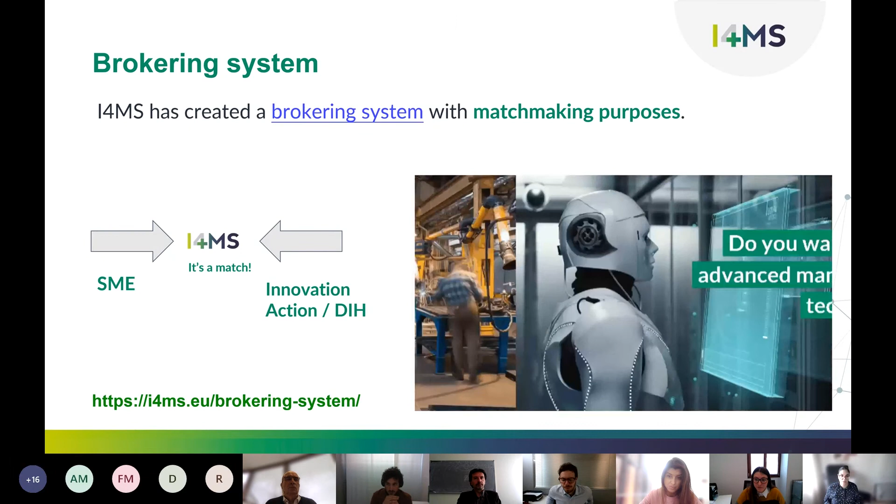We have created a brokering system, so if you actually are an SME, are a bit lost and you don't know exactly where you have to go or which open call would be the best for you, we can help you with this process. So you just have to sign up, and I4MS will help you find the best funding opportunity for you under its program.

Very briefly, we have also a community in which we debate about different Industry 4.0 approaches. I wanted to just let you know about it. We have 1,700 members. Half of this community is SMEs, but there are also some public administrations, DIHs such as Speedhub. So if you want to get to know it, it's there for you.

Just to show you a little bit, there are some success stories that are worth taking a look, and we have in the website a lot of experiments. For example, one of the experiments is related to 3D printed clothing, but not only. Everything that gets manufactured and that adopts a technology presented by I4MS, there are several experiments that you can take as an example in order to see also if you are fit for this type of calls or not.

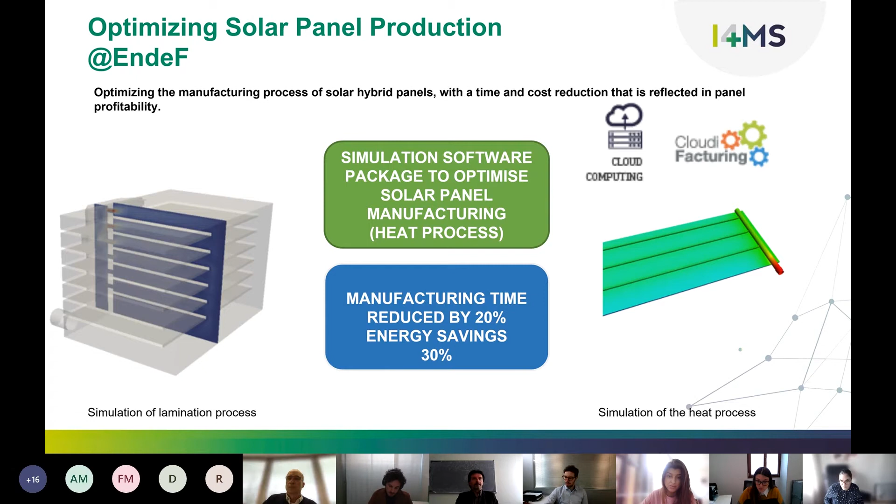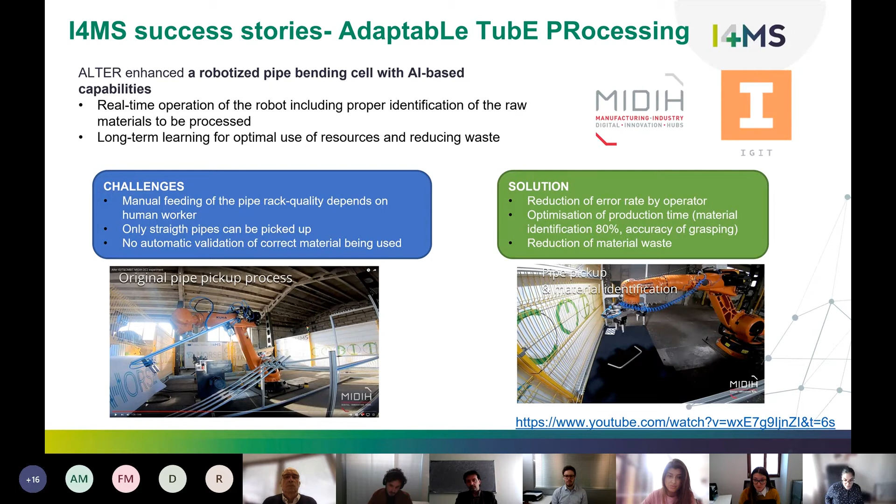Yes, and there's another one of the MIDIH project. The idea is that now I will give voice to the actual protagonists, so we will start with Better Factory. Anca, the floor is yours to explain the soon to open call and also what we are going to be doing.

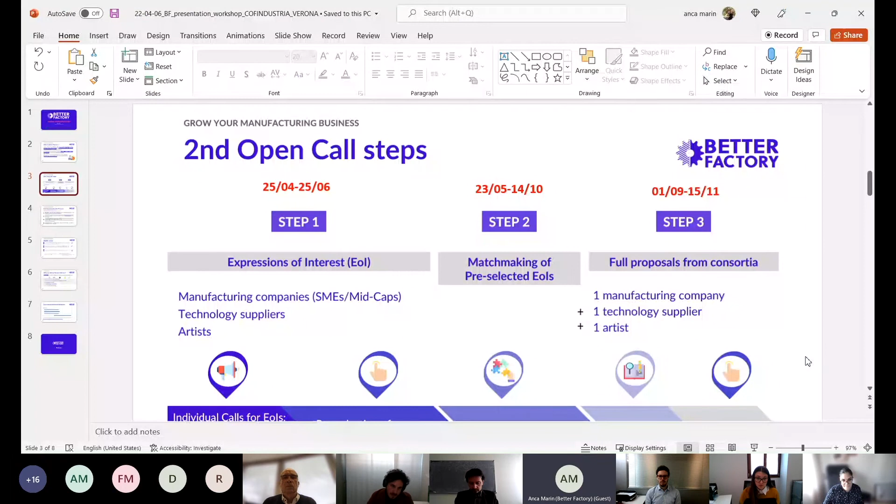Okay, thank you, Marta. Hi, everyone, nice to see you here. I'm very happy to present you today Better Factory, which is an initiative under the European Commission Horizon 2020 program.

Basically, we are inviting manufacturing companies, artists, and technology suppliers to work together in order to redesign the manufacturer's product portfolio. This can be a very interesting challenge, which can end up in a collaborative experiment made up by teams of one manufacturing company, one artist, and one tech provider, and they can receive up to 200,000 euros funding.

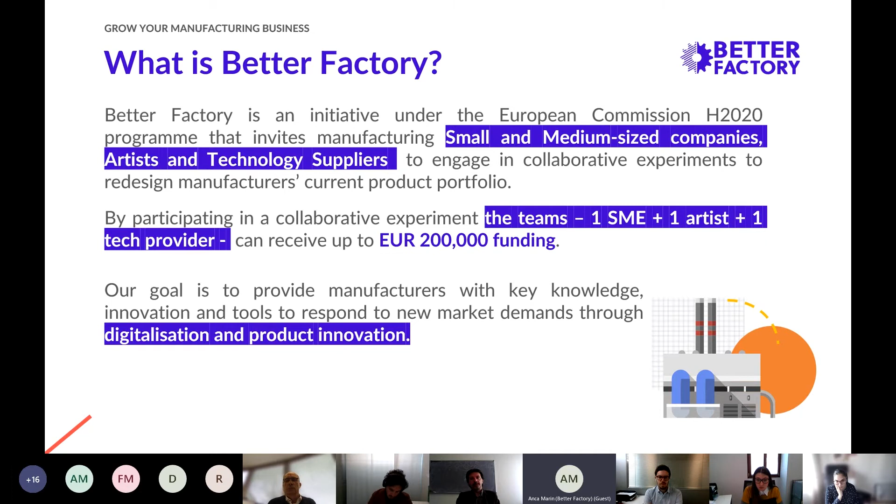We are now in the previous step regarding the second open call, and this step consists of individual applications, which are available from the 25th of April. The call is open from the 25th of April to the 25th of June.

This is where we are inviting individual applicants, manufacturing SMEs or mid-caps, technology suppliers, and artists to apply separately in order to have a chance to be pre-selected and join the matchmaking process, which is being supported by the Better Factory Consortium.

In this matchmaking, which we enable for the pre-selected applicants, we are trying to find the best fit between a manufacturing company, a tech supplier, and an artist, in order to assist them to design, create, and present the full proposal in the open call for a full proposal from consortia.

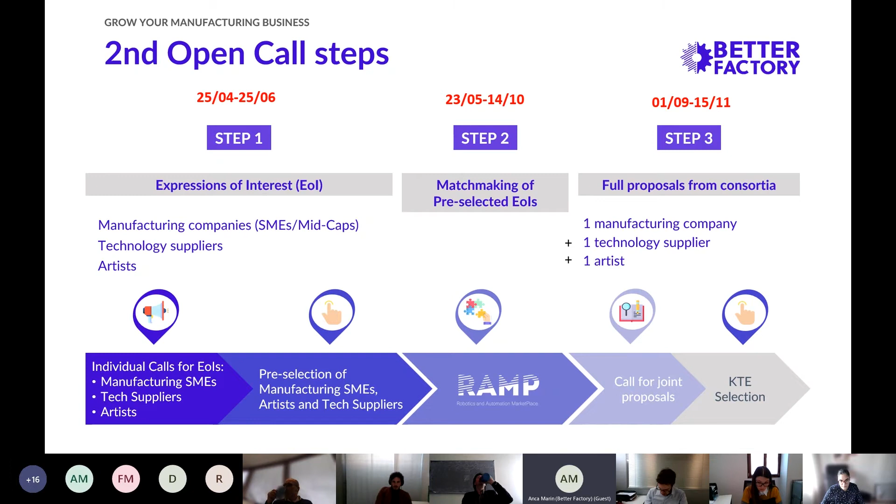This is going to be open in September this year. So at the stage of individual applications, we are inviting manufacturing companies, which can be small and medium enterprises or mid-caps, artists, and tech suppliers, to register and submit their application online.

They will find the application form available separately for each type of applicant. This is quite a simple process where we ask you to fill in information regarding your basic data, legal information, a brief description of the challenges in the case of manufacturers, the artistic expertise in the case of artists, and of course the technology you own in the case of technology suppliers.

After you have submitted these individual applications, you will go through a pre-selection process, which is done internally by the Better Factory Consortium partners. Once we have the results, we are going to communicate the outcome by email to all applicants at this stage.

The pre-selected applicants, as mentioned before, will also be announced, and they are going to enter the matchmaking process in order to form a team of one SME or mid-cap, one artist, and one tech provider, to submit the full proposal for the second open call in September.

As I've said before, manufacturing SMEs and mid-caps are one of the individual applicants we are inviting at this stage. If you are one of those and you are looking to redesign your current products and services with the help of an artist or a technology supplier, you are more than welcome to apply to this open call.

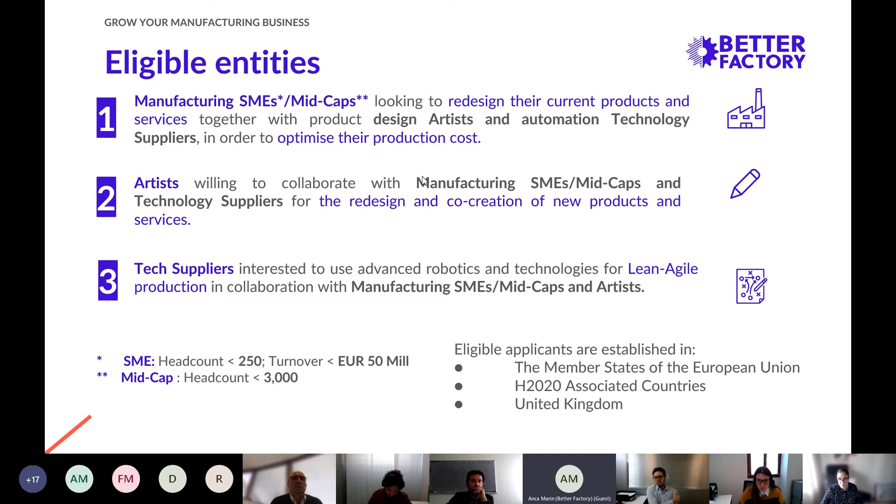So our offer, our value proposition for you right now, is to enter this individual application process in order to get a chance to form a successful consortium that will explore new markets using digital technologies, and test and develop new lean agile production technologies.

The winning consortia will also get access to training to reskill staff, get business support and mentoring, and of course up to 200,000 euros in funding.

I will leave a link to the main landing page where you will find the individual application forms for each type of eligible applicant at this stage. You can also find the guides and documents I mentioned before. We also have a help desk in the community spaces where you can address any questions you may have about this step.

One important aspect I'd like to underline before I go is that this is an optional step in the process of the open call for Better Factory. You can either apply at this stage as an individual company, a manufacturing company, an artist, or a tech supplier, or you can form your own consortium outside the matchmaking that we propose through Better Factory partners. The idea of the matchmaking is that you get support elaborating the full proposal and submitting it in the open call. However, it is not mandatory, and if you apply and are rejected at this stage, or if you decide not to apply, you can always apply in September for the full proposal.

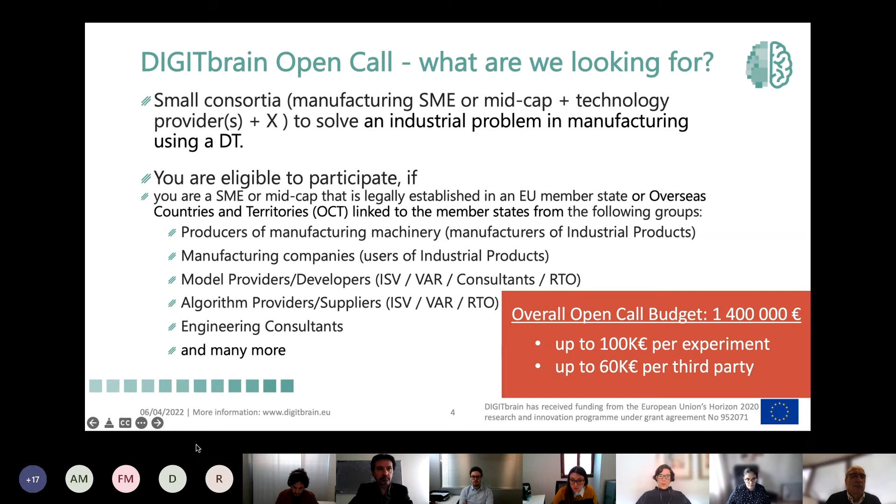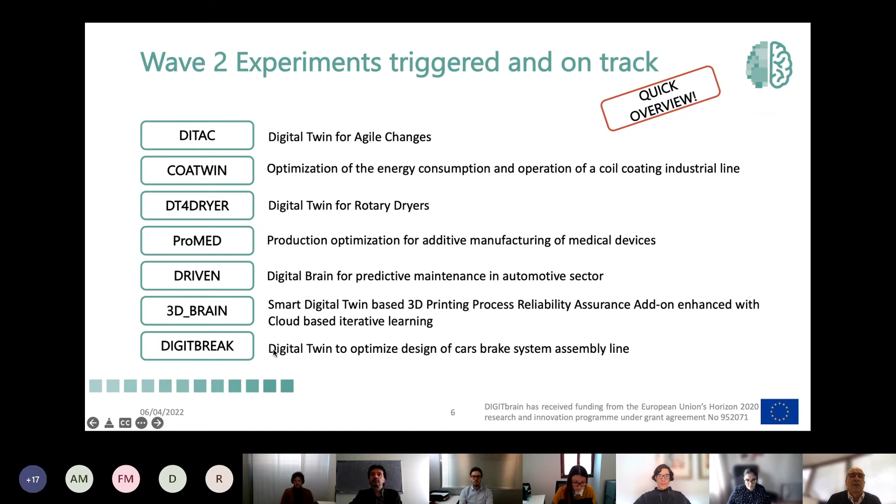The proposal submission deadline is the 31st of May, 5 p.m. But as a mini consortia, you are not alone.

We also have at least 6 digital innovation hubs which co-work with you. If you are thinking of writing a proposal, my suggestion would be: please first select your DIH, get in contact with them, collaborate with them, get help from them, because we put them into our experiment as guidance and support for your mini consortia.

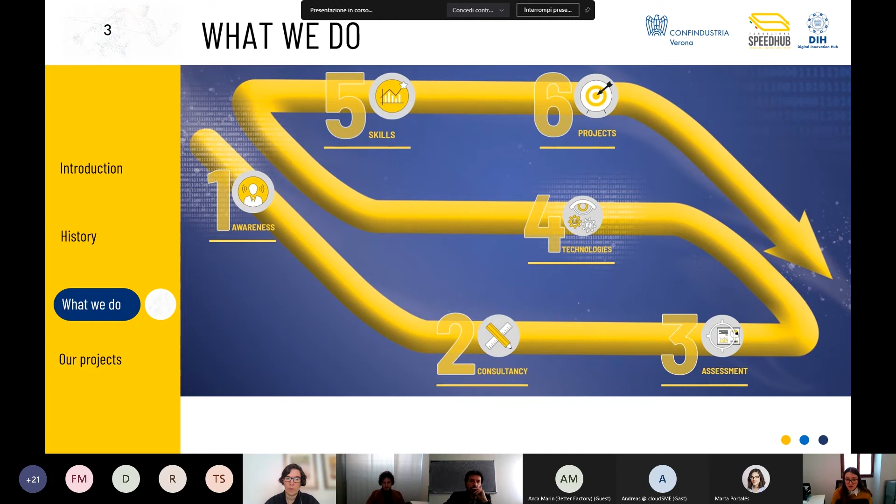I hope you can hear me clearly. With my speech, I would like to present some projects on which Speedhub has focused in recent years. The first two involved Speedhub as technical partner in regional innovative networks, which combine SMEs and large companies with university departments, with the aim of proposing technological innovation projects in certain business processes or sectors.

The two networks are Tech for Life, which refers to the healthcare sector, and Rivelo, which operates on the topics of logistics. In the first case, Tech for Life, innovative projects will be considered concerning the application of digital technologies to the medical sector, not only for companies producing goods and services, but also for hospitals or similar structures that need reliable real-time information and safe data protection systems due to the sensitive data they process.

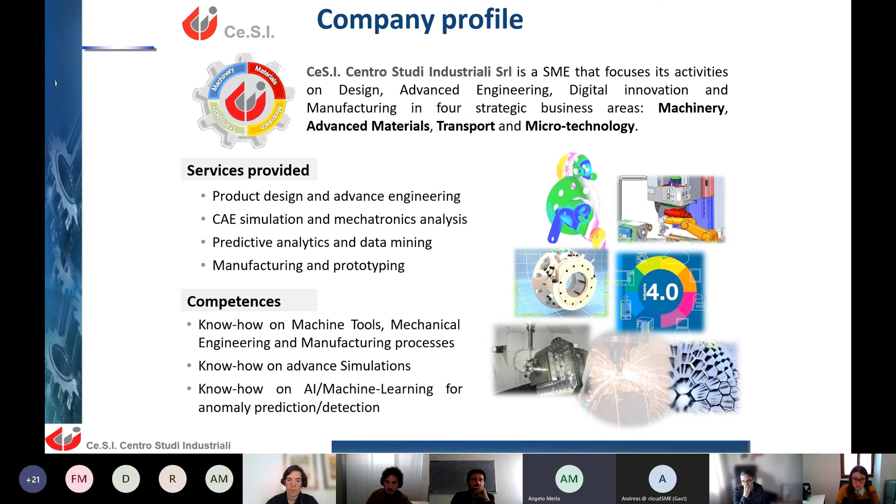Our competences are in engineering, machine tool, mechanical engineering, manufacturing processes, advanced simulations, and artificial intelligence, machine learning for anomaly prediction and anomaly detection. Okay, next one.

Okay, I just want to finish here, because most of my presentation will be related to the application of artificial intelligence within the project IPER, to show you real cases. Okay, thank you. Thank you, Angelo.

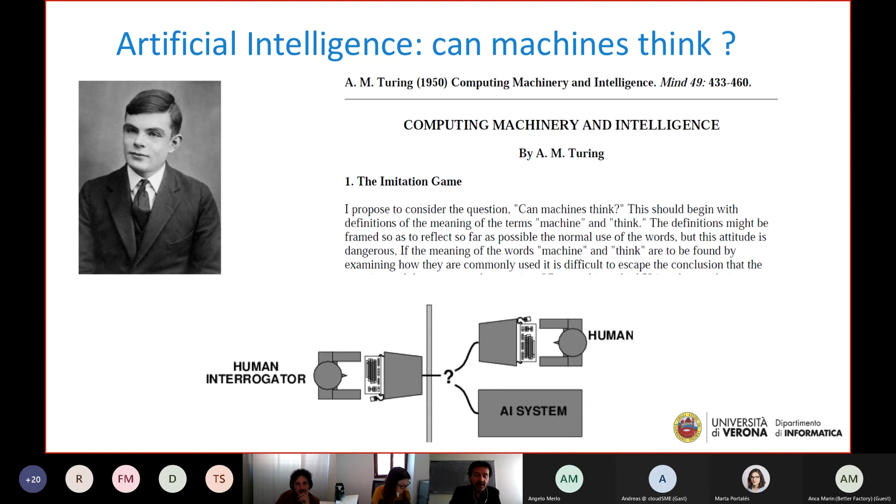Later, in '56, very close in time, this is where the term artificial intelligence was first used, for a research project at the Dartmouth school, where the idea is a bit different - the basic idea of what AI is now, the modern AI: to make machines solve kinds of problems now reserved for humans, and also improve themselves, which relates to learning and adapting to different situations in the environment.

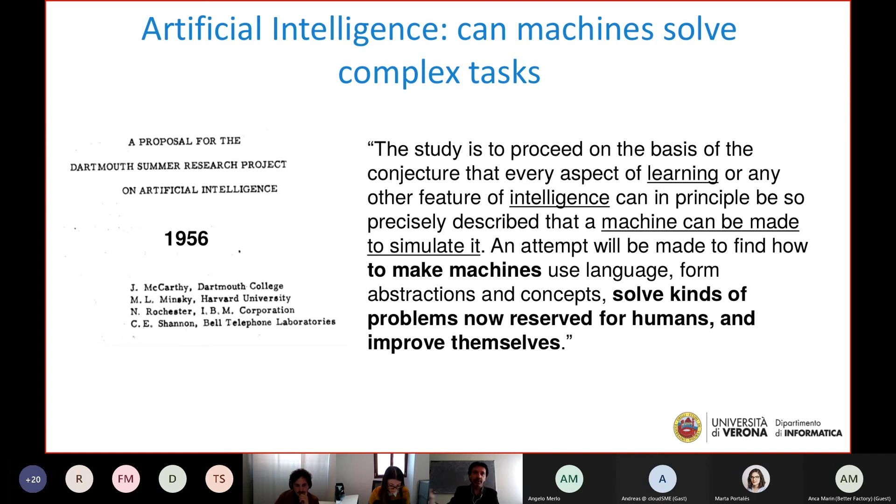The interesting thing is that now artificial intelligence doesn't necessarily mean machines that think the same way a human would think, but that can solve complex tasks reserved for humans. This is essentially the modern interpretation of artificial intelligence, at least from the engineering point of view, which is what we care about for this presentation: machines that solve problems requiring what we think is human level intelligence.

So here you can see some interesting examples. Autonomous cars is a very famous one - in the last 10 years there has been incredible, impressive advancement in this area. This is obviously a complex task that typically needs human intelligence, but that can now be achieved and solved, even in some conditions, by machines. So that's a very good example of artificial intelligence.

Other examples are robots playing football - the RoboCup initiative is pushing AI towards the goal of having autonomous robots playing football. In the bottom left you can see a system known to many of you, the Amazon Kiva system - small robots that can transport pods in a warehouse. It's a very good example of robotics applied to indoor logistics. We'll talk about this a bit more later.

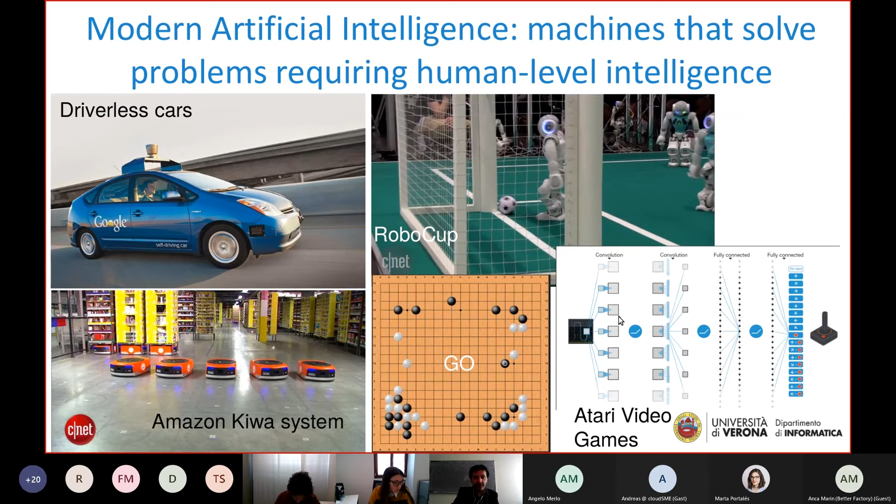So these are all interesting applications of AI in different fields. Some of these are very related to Industry 4.0, some are less. But what is the role of AI for Industry 4.0?

Then in the 2000s, there has been this Kiva system that has been used by Amazon. And now, if we follow the evolution of time, we see this type of robots being used, not very much, not very well spread, but they are used in some industries, which are collaborative mobile robots.

So essentially, if you look from left to right, what I think is interesting to see is that what is increasing is the level of flexibility. If you go from the 80s, you have an isolated cell where the robotic arms were doing very specific tasks, very fast, very precise, but very specific. So no change in the task that they need to do.

In the 2000s, you have these robots going around in an area which is still highly engineered and designed for robots, but at least they were sharing the operative space together with other robots and humans. And now the real interest towards Industry 4.0 is to use this kind of system, not only robotics, but robotics in cooperation with humans, which is the next step where a lot of the effort has been directed.

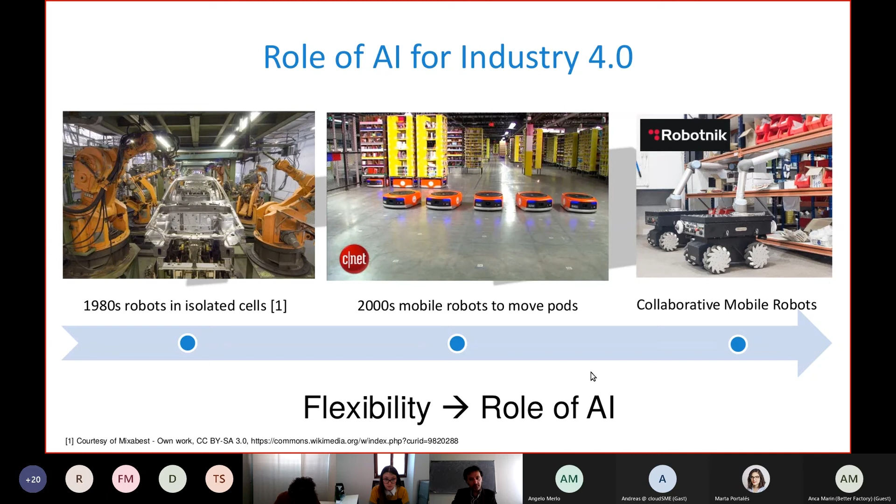What is the value of AI for Industry 4.0? Here I'm trying to give an overview on two main axes. One is related more to data analysis, and many examples have already been given by previous talks and probably also from the next one. The other one is for autonomy.

So if we focus on data analysis, essentially the value that AI can give is the fact that you can have an automatic system that can process huge amounts of data. And what you really are interested in is the fact that this huge amount of data can be compacted. At the end, data analysis is a sort of filtering operation where you extract information from data. This is what you really want to achieve. And on this, the value of AI, I think, is quite clear. So there are a lot of projects where you are actually trying to use AI for this scope.

Here I'm giving you some specific examples, so to give some more context. For example, these are all projects in which the computer science department has been involved at different roles. And so this is also an interesting overview on how there is a possible collaboration between the computer science department, or in general the university, and SMEs, or industry in general.

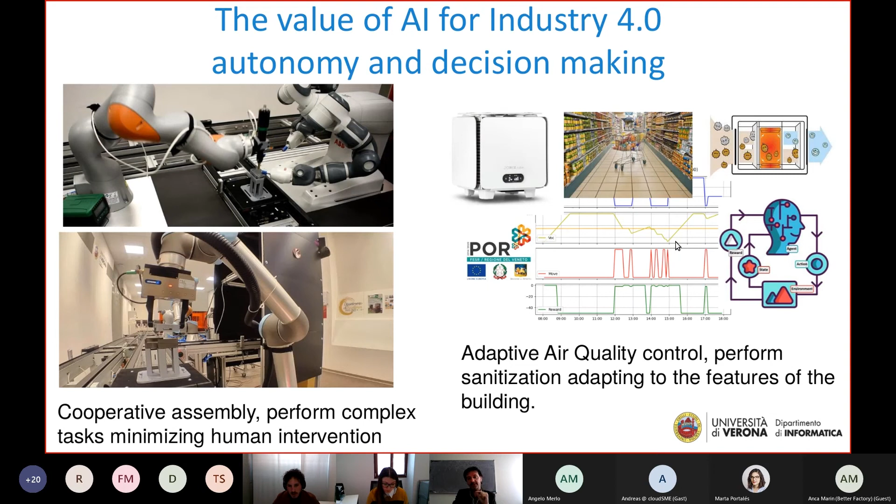As I said, one thing to keep in mind is that the use of AI in the world of Industry 4.0 and manufacturing in general is not easy. There are several barriers and challenges. Most of these are actually addressed also by I4MS and by Speedhub, so we are on the same line, so to say. Based on what I've seen in this area, the main issue is the lack of availability of technical expertise, because this is a world that is changing very fast in terms of methodology and algorithms.

So it's very difficult to have the technical expertise in-house to do what you would like to do. Another big problem is the interoperability of the different devices and machines. Typically in a production environment, you have machines produced by different providers that talk different languages. Interoperability should not be given for granted.

This comes to the third point, which is probably for modern AI one of the biggest challenges when you talk about Industry 4.0: the availability of reliable and high quality data. A lot of these machine learning algorithms are based on data, but having a lot of data is easy, while having high quality and reliable data is not so easy. So you need to consider specific platforms and data collection methodology to achieve this.

Another important point is, of course, that you need a significant investment up front, and this may not be available for standard SMEs. This is particularly true for the Italian ecosystem, where typically you have small SMEs that cannot make a very big investment up front.

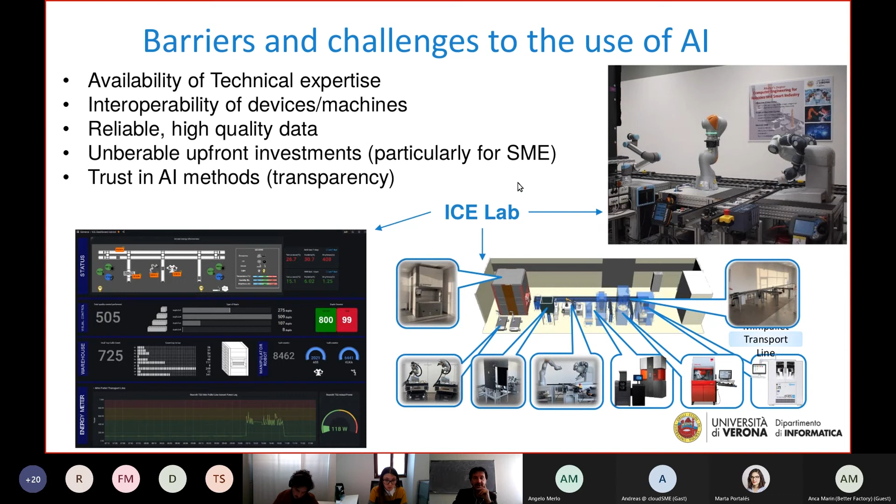So on our part, as the computer science department of the University of Verona, to try to partially address these challenges, we established this ICE lab, which I will describe. This ICE lab, mentioned before in the presentation by Speedhub, stands for Industrial Computer Engineering Laboratory. The idea is to have a lab that can be a middle ground between what is performed on the research and innovation side, at the university, and what is actually needed by companies that need high TRL solutions and need to test solutions in a close-to-real environment.

This Industrial Computer Engineering Lab was realized as part of the Dipartimenti di Eccellenza project, which was awarded to the Computer Science Department of Verona in 2018. It was a significant investment, and one of the main results is the ICE lab.

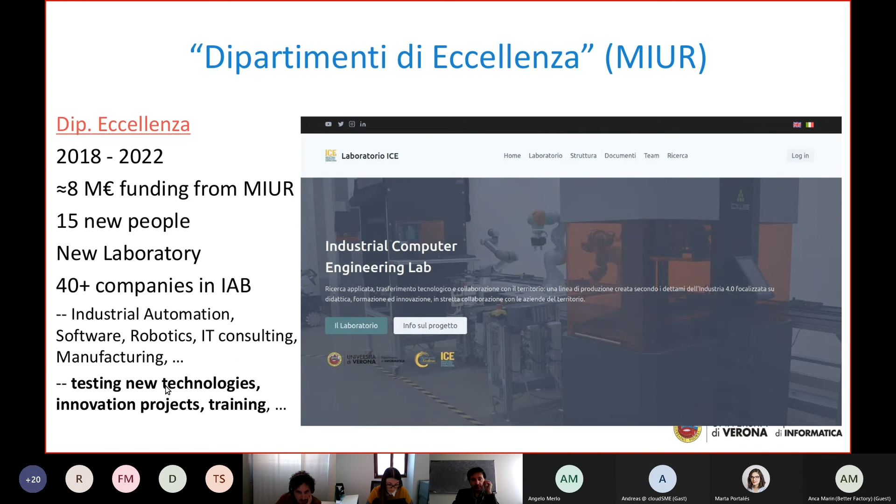There is a strong connection with companies of different types; more than 40 companies are part of the Industrial Advisory Board. Speedhub also has a specific partnership with us. These companies operate in different aspects of production, such as industrial automation, software, robotics, and so on. The most interesting thing is that the idea of the ICE lab is to make available to companies the testing of new technology, the possibility of doing innovation projects, and also training.

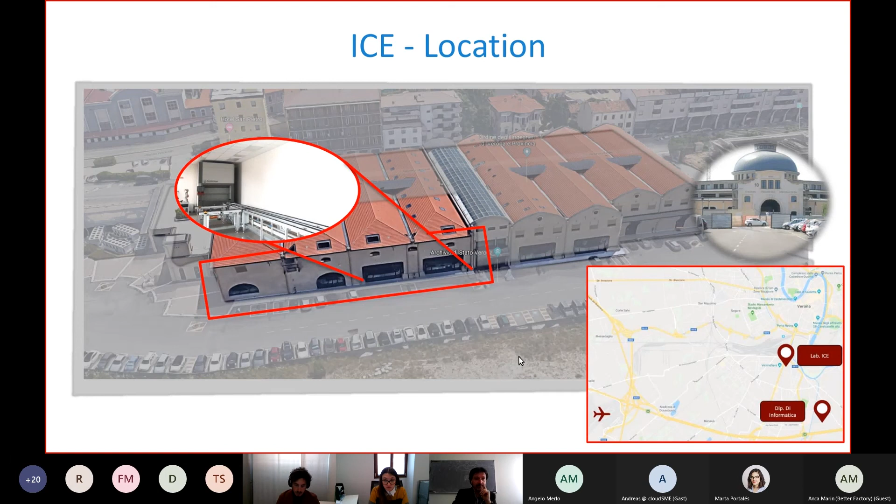This is the location of the ICE lab, which is quite convenient because it's in Verona, in the area of the ex-Magazzini Generali, close to the train station, and it's a significant amount of space that we devoted to the lab. This is what is present at the moment in the lab. The lab was started in 2018, and the project ends this year. I will show you some parts of the system working in operation in a couple of movies.

I will not go through all the different technologies, but there are various types present, among which mobile robots, fixed robotic systems, a mini pallet transport line, an automated parts storage, and so on. The important thing is that all these components are not research products; they are products that can be and are actually typically used by companies, both on the market and in use. So this is the idea that you can actually test something in a close-to-real production system.

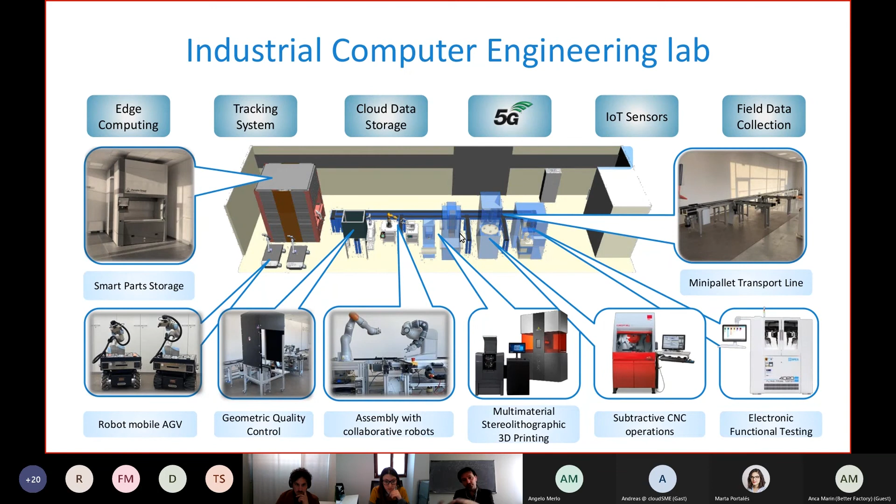One thing we focused on in the development of the lab and the technology is a specific case study, where the idea is to have the production, or better the assembly, of a specific object from start to end, with the project going through different phases. In the following movie, I will show you some of these phases. Essentially, the idea is to have a small gadget containing an electronic circuit that has some sort of connectivity and can be detected by the system. These three parts are assembled by the system following a recipe designed at the beginning by a human.

Also, this object is specific, as it contains essentially the name of a user. Towards the end of the production phase, the user can actually be recognized because they will shake the object, which activates the gadget. Through vision, we can recognize the shaking gesture and assign the user to the name, so you then know where the user is inside the system as well.

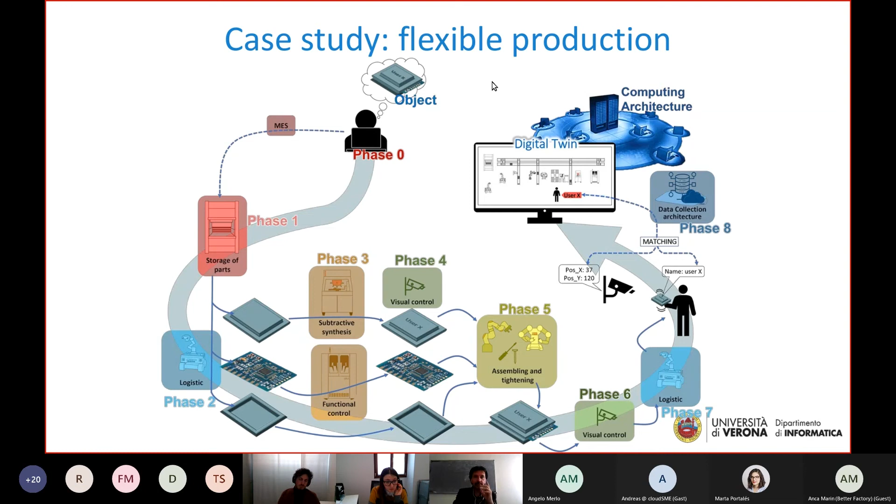This is a case study, not a real production, but it's meant to show all the possibilities of the different technologies. One big part of this demo is the use of these collaborative mobile robots, called RB Kairos. These are two mobile bases with manipulator arms on top, equipped with several types of sensors to perceive the environment, and they can essentially do pickup and transportation tasks, which are crucial for indoor logistics.

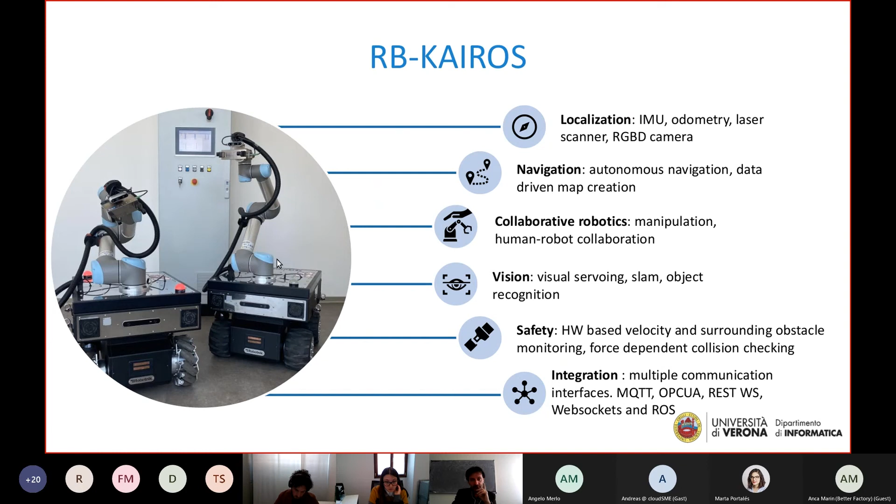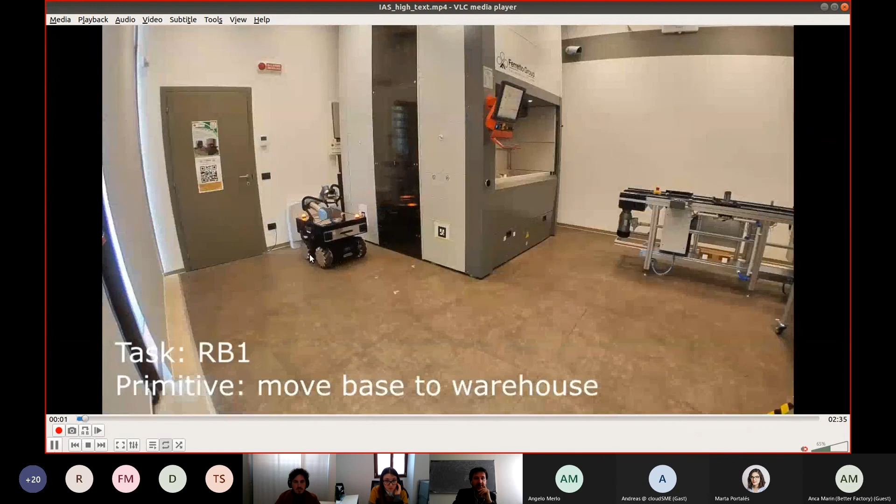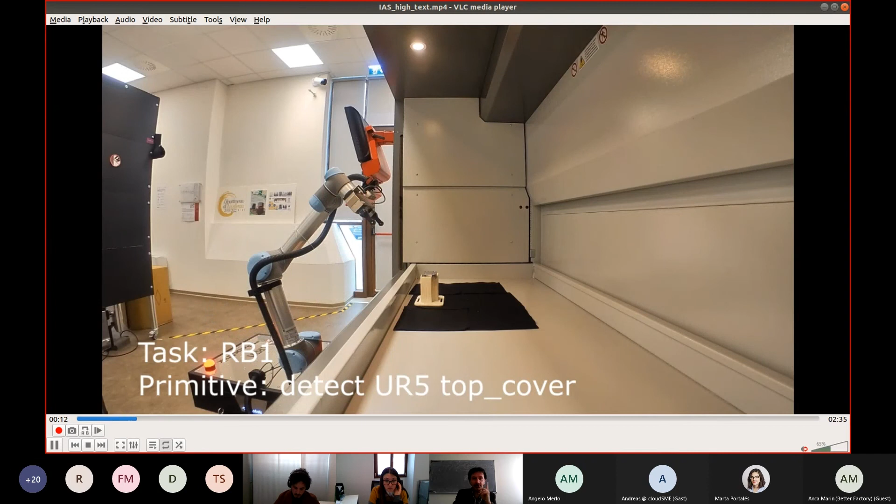So this is a movie where I can show you part of the system in operation. You can see here the mobile base is going to fetch the object. This is one of the parts that will be assembled together, the top cover. What you can see is the automated storage system, and this is the robot picking up the object, which will then transport it to the assembly station.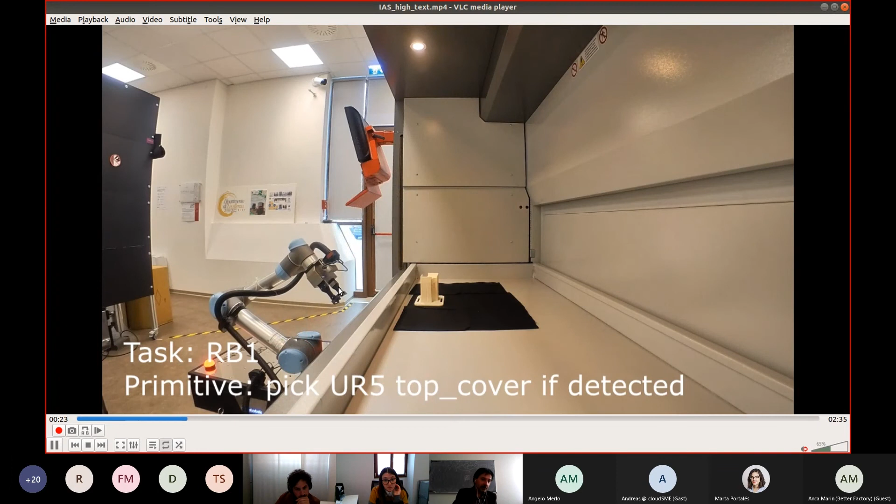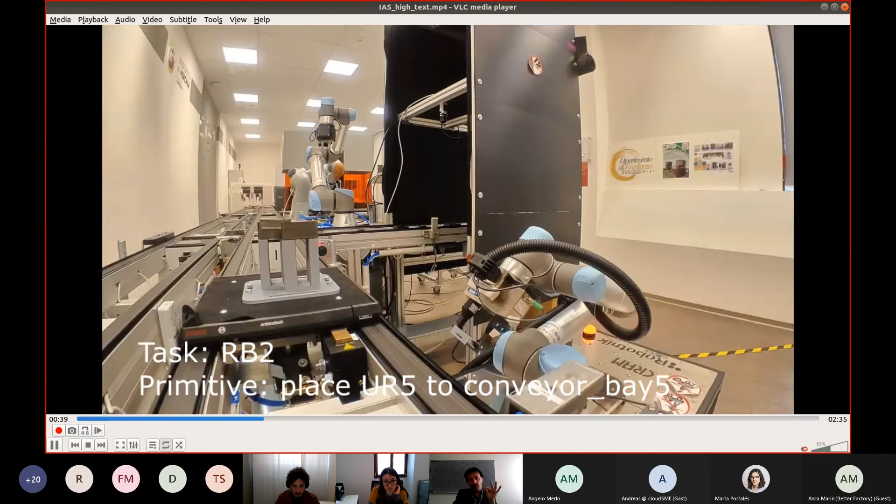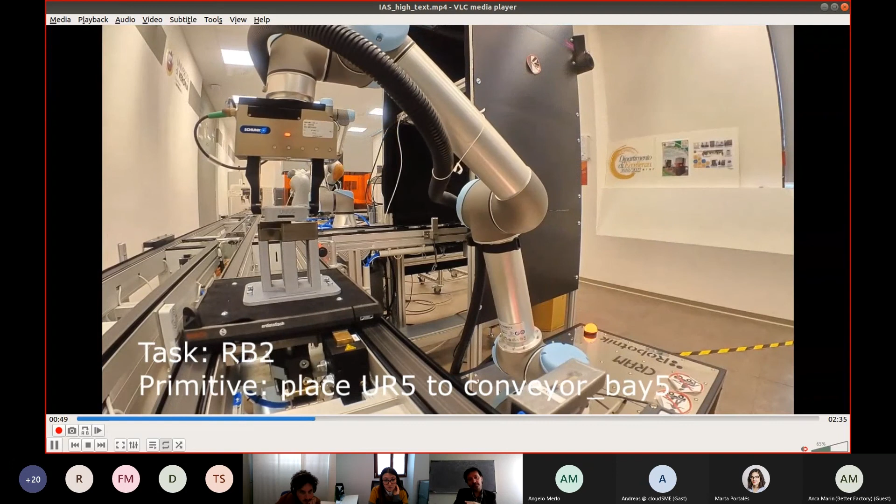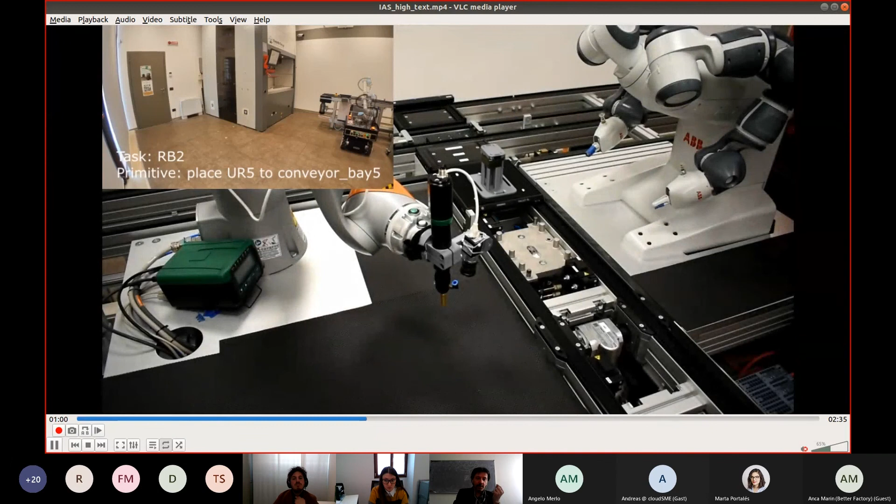One interesting thing I'd like you to notice is the text you see here during the demo - in this case, place UR5 to conveyor bay 5 - is not just a description, but what the designer should write. This is the recipe, if you want, and it will be directly transformed into a plan for the robots to follow, then executed in automation. So it's interesting to see that you can give high-level indications to the system, and the system will take care of all the rest.

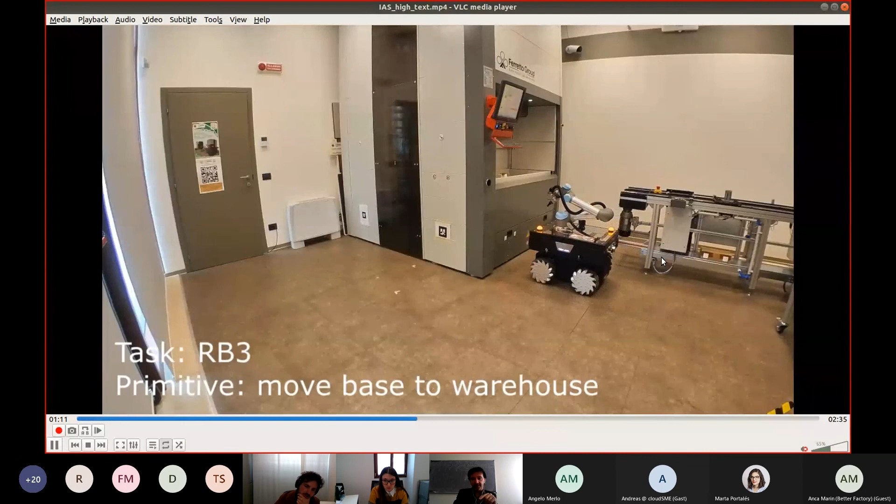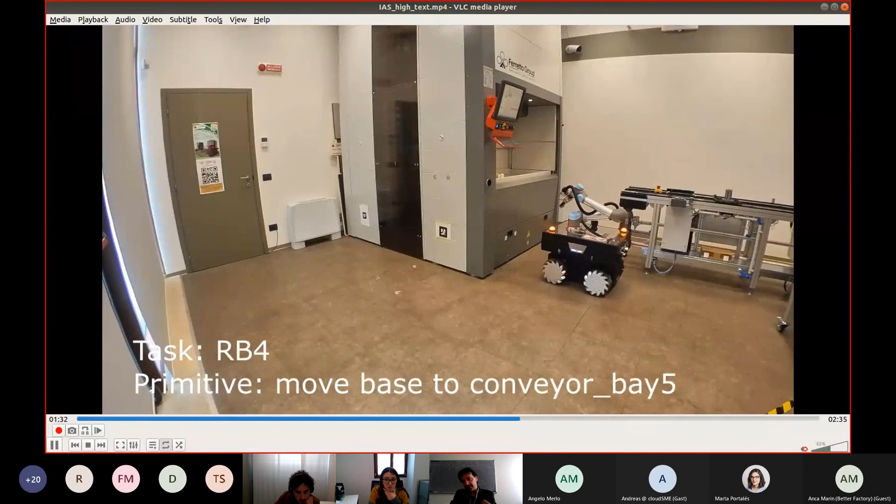In this case, you could see that the part has been removed from the conveyor belt. Then the second part will be detected and picked up by the system. As you can see, the primitive is very compact - it says pick the top cover. The artificial intelligence's role here is to transform this down to actual commands to the motors, so that the system is able to do this.

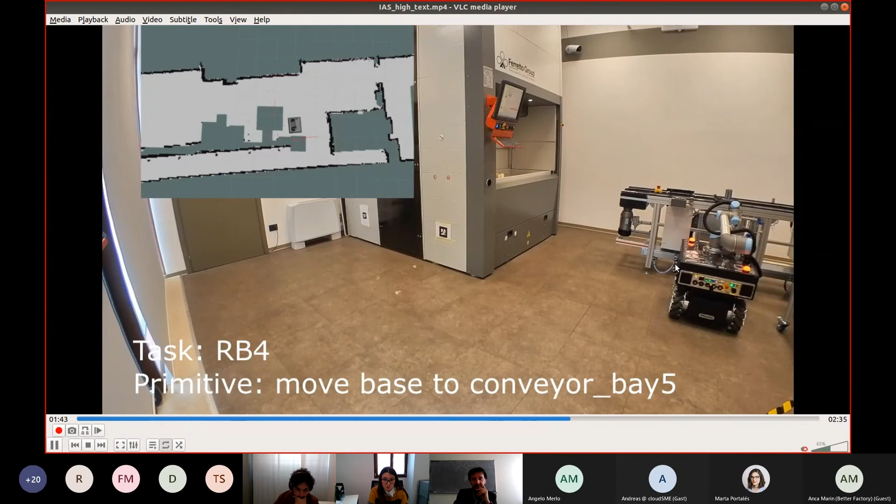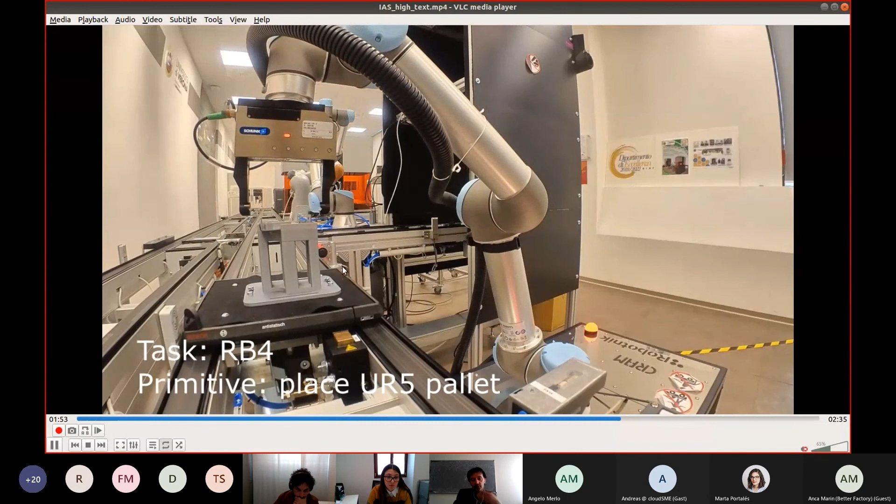Once again, the robot now aligns with the transportation system, so it will put the object on the transportation system. The interesting part, which you don't see in this video, is that if some of these actions don't go as they should, the system is able to detect this and reschedule the operations, to make sure that at the end we have a successful operation.

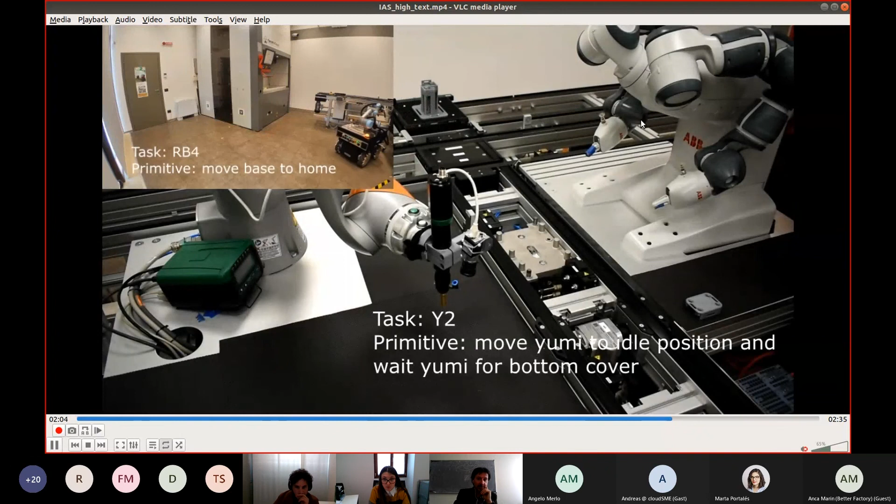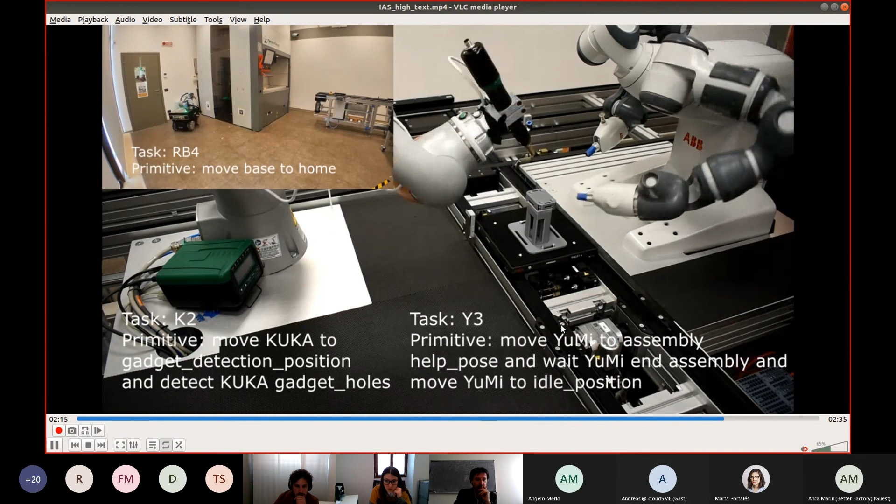The last part is a cooperation between these two robots, the Yumi from ABB and the KUKA robot. In this case, there is the final part where the KUKA robot will actually place the screws into the different holes and complete the production of the object.

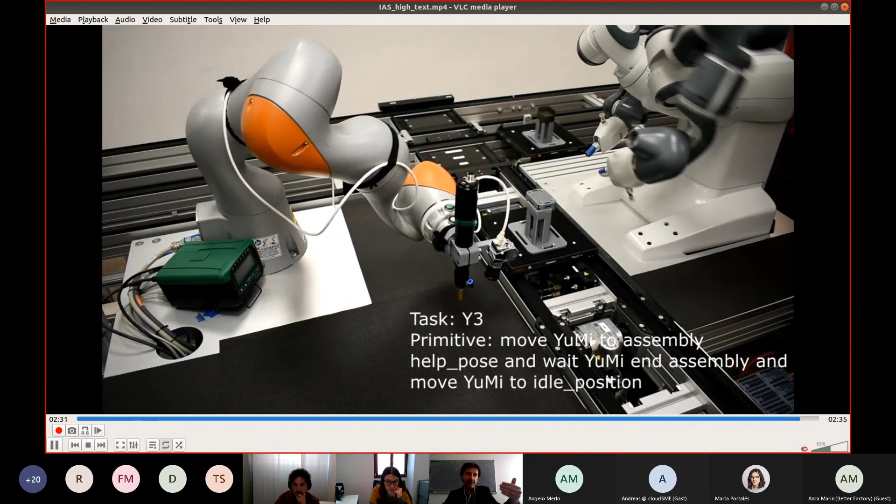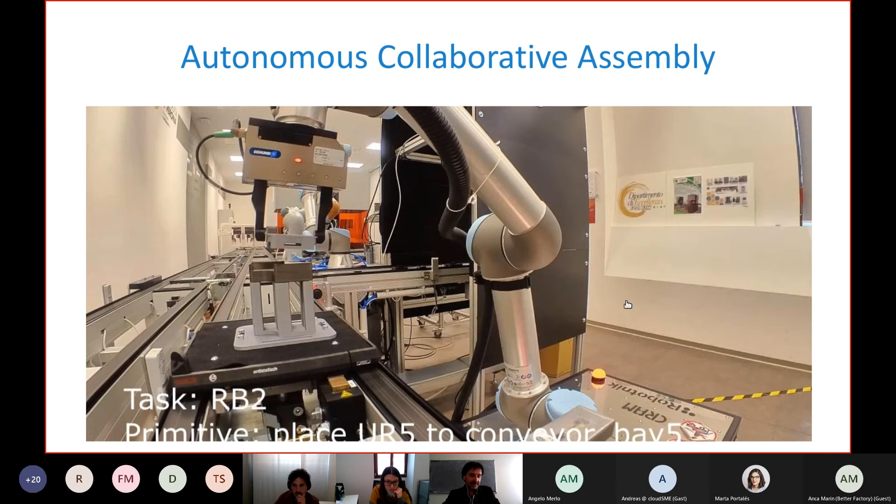So as I said, obviously this is not a system that can be used for production, but it's just to show the different parts of the system in operation. The most important part is the fact that this is an autonomous system that can perform several tasks in complete automation. This is another interesting movie, let me go a little faster here.

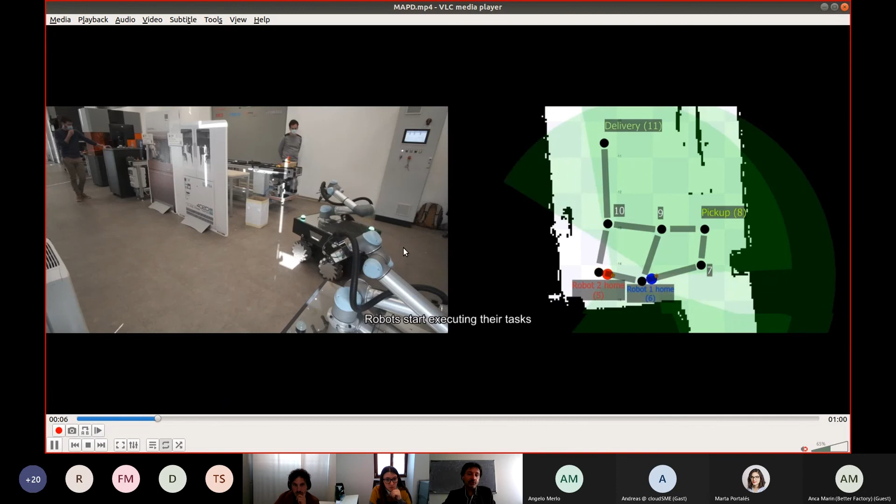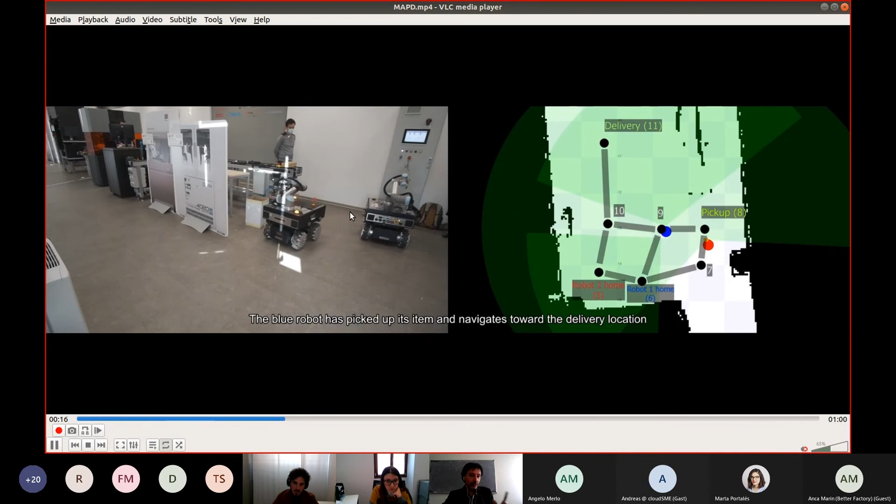Here you can see two robots moving together in a shared space. This movie is interesting mainly because the robots can find out which route to follow to avoid conflicts between them. And they're doing a pick-up and delivery - in this case, the human places the object, the robot is just transporting it.

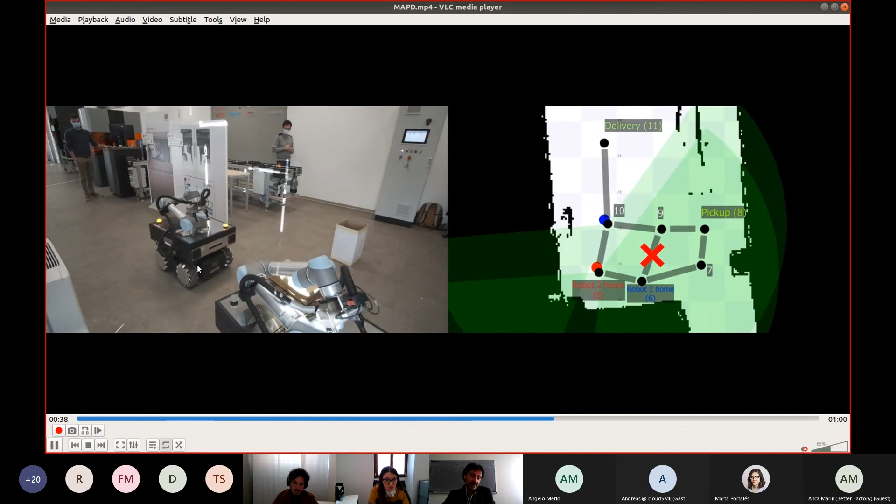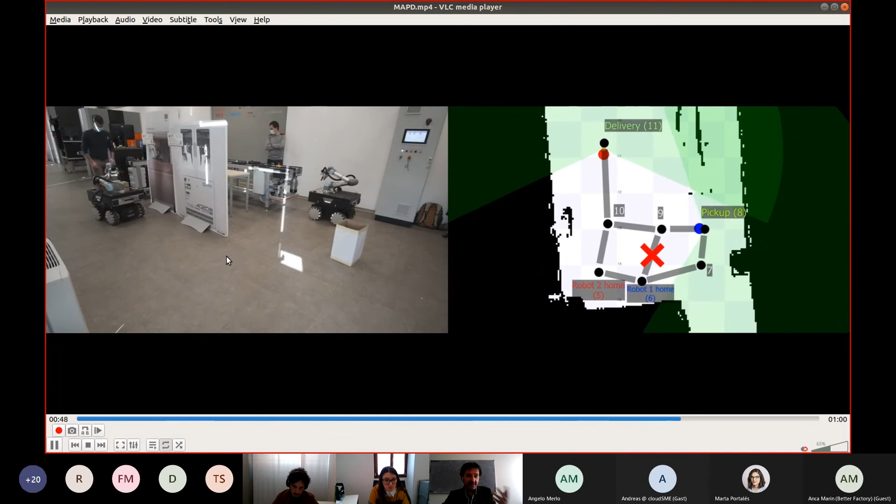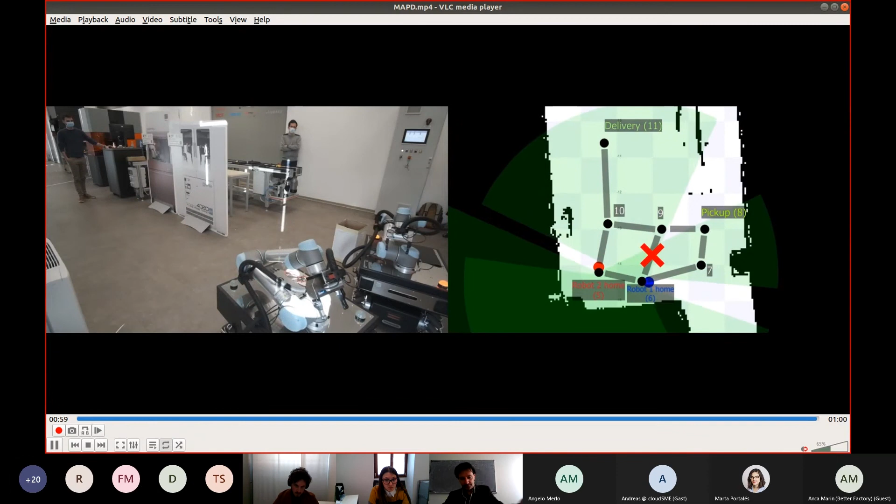As you can see now, there is an obstacle that was not present before. You can see this with the X on the topological graph. And now you've seen that the red robot moved away from its previous point to let the other robot pass. This is an interesting, complex behavior to achieve, and it also comes back to the concept of trust. The system should be able to explain why the red robot moved away from the goal - it should say, I moved away because I let the other robot go through. If this is possible, then you have trust in the system because you understand what it's doing.

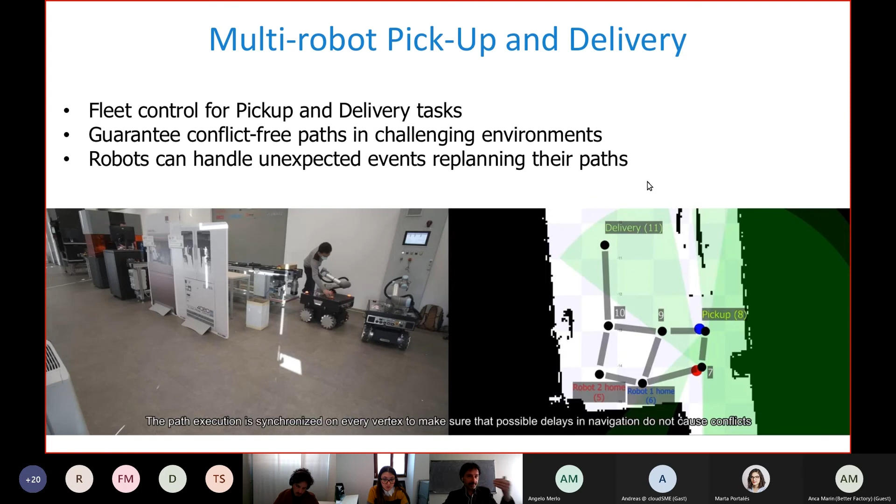This was a brief overview of where we are with the development of at least the robotics part of the ICE lab. There is much more, of course, but I cannot go into the detail of everything. The current focus is a transition toward Industry 5.0. This is a new trend and relatively new name, where essentially the idea is to involve the human in the production loop much more than what you've seen now, and this has to do as well with virtual reality, augmented reality, and so on.

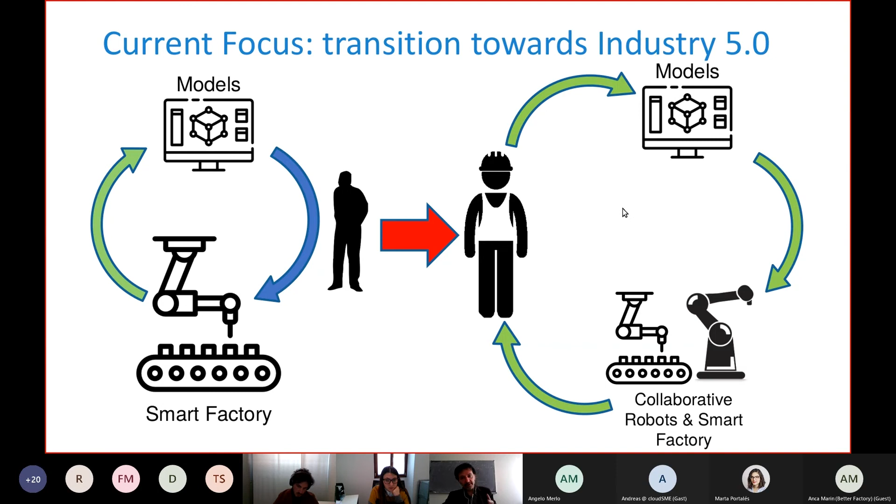And next year, 2022, so in October, we start a new master degree in AI, which is more general with respect to Robotics and Smart Industries, and focused really on AI techniques, focusing on the two lines that I mentioned before: perception, data analysis, decision, and support systems, to address the full spectrum of the value of AI for society in general, but Industry 4.0 in particular.

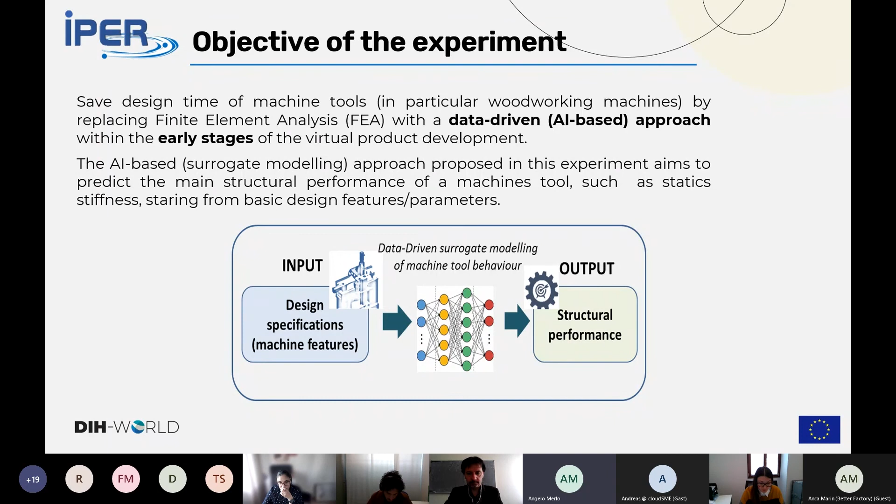So which is the state of the art? The state of the art is that the performance of the machine, for example, I apologize if I use some technical words, but the most important features for performance that the designer has to assess are the stiffness of the machine and the first modal frequency. The stiffness, because the stiffer the machine, the higher the quality of the workpiece that you machine. And the same for vibration, the higher the first modal frequency, the better the machine performs in practice.

Today, such parameters are simulated using the so-called finite element analysis tools or high fidelity tools. And it takes a lot of time to model the complete machines, because you have to create a model, a finite element model, very detailed, in order to be able to predict such characteristics.

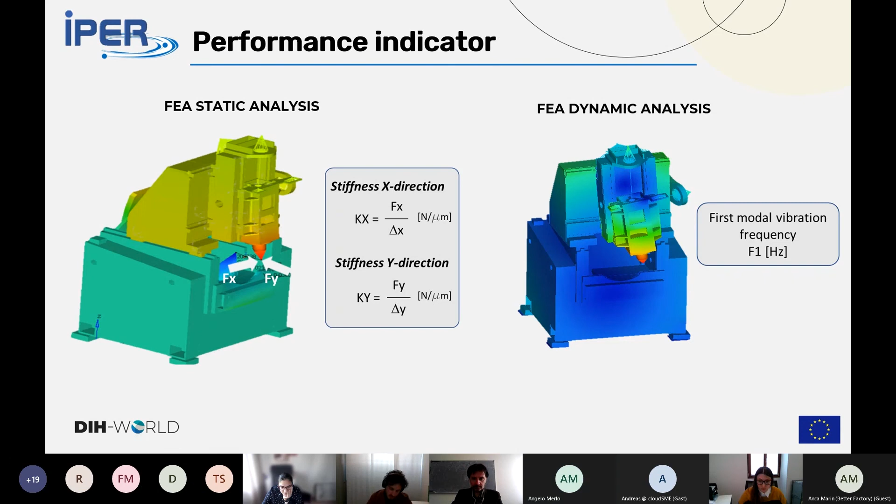This is a very time-consuming and expensive procedure, because it takes weeks to do, since modeling the machine is not simple. So we are talking about weeks.

What we want is to have a surrogate model, a model based on AI that has been trained and is able to correlate design parameters to performance—the stiffness or modal frequency we see. This surrogate model is a black box model that's very, very fast and quick to run. We're talking about minutes, not weeks, to train and deploy.

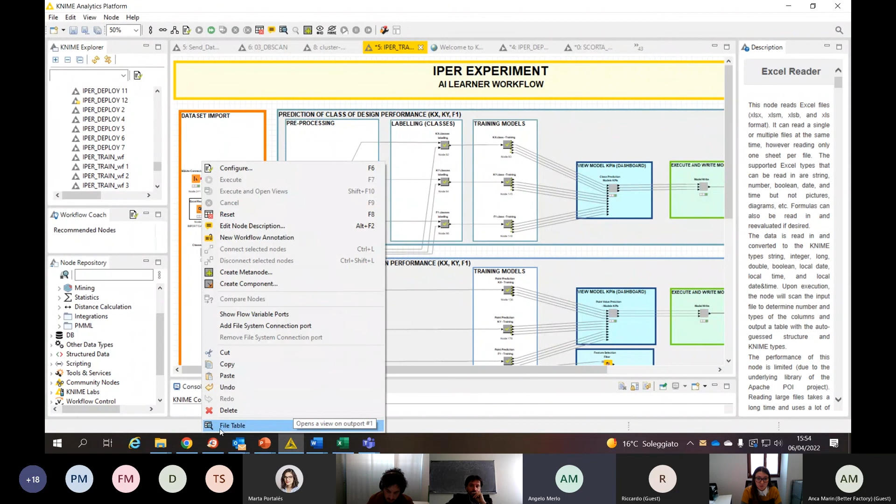So the programming is very minimized, and can be used also by medium range engineers in the field of data science. Okay, I move to the live demo before showing the final result. Here is the environment. I don't want to explain the whole tool, but you see some of the blocks. This is the Learner workflow, where we start by importing, for example, past results, where we have all the variables, and some are not known because we have a lot of data.

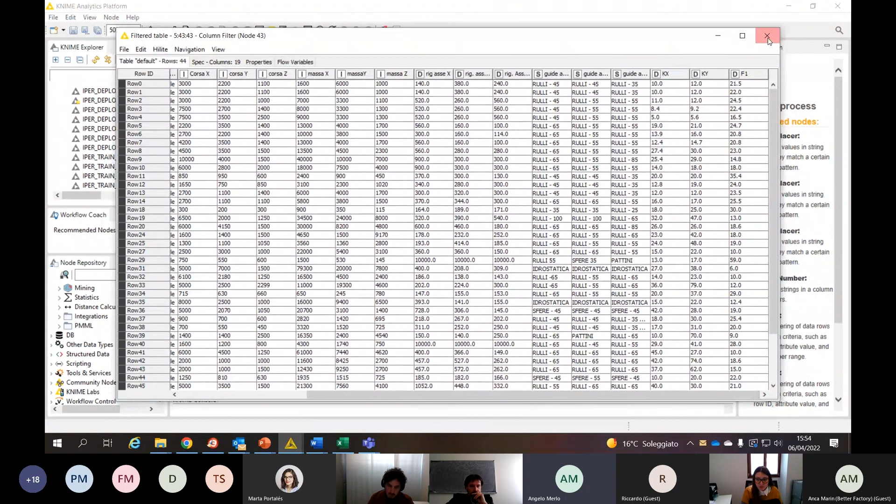Some others are known. We also apply some filtering and adjusting of past data, and then import it. Then we have a correction—you see here the filtered data where we remove missing values. We apply some rules where there are missing values, and so on. We import a lot of past data that are the input variables, and then also add the output. So the stiffness I know, because it's from the simulation. And here we generate—this is, as I said, supervised learning.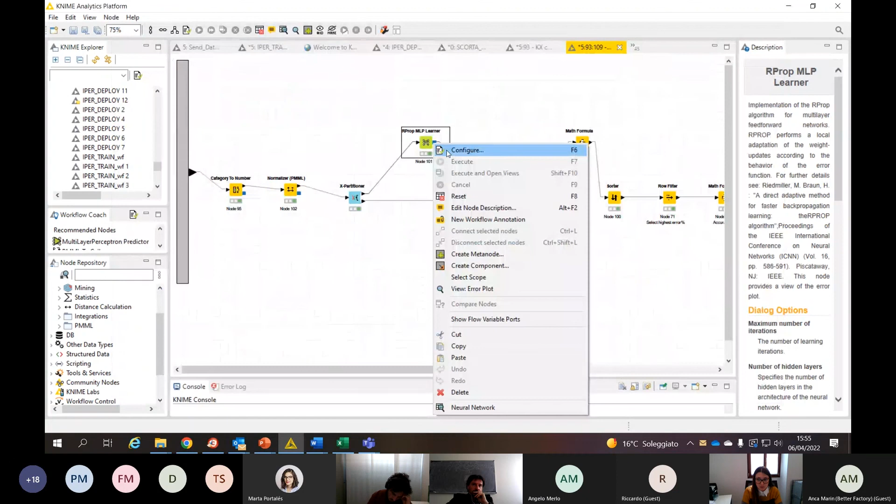Here, for example, you see where we apply decision tree, random forest, artificial neural network, and it's not programming. For example, for the artificial neural network, you just have to put the number of layers, the number of neurons. So it's a very user-friendly interface to set the parameters you want.

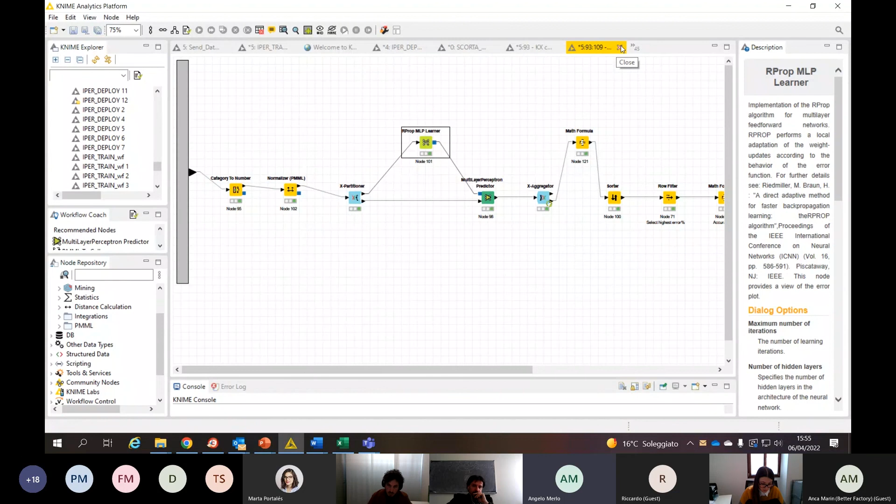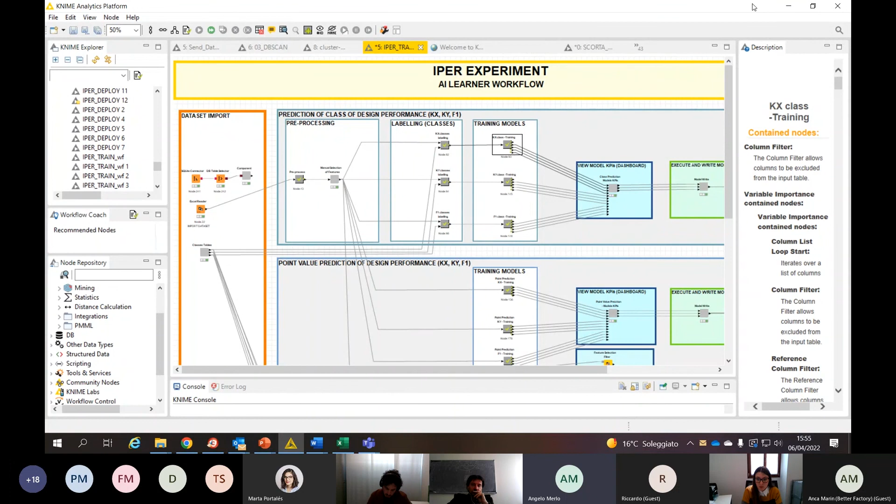This is the Learner model. As I said, the data scientist has to prepare such a module, even if the tool is very easy to understand and can be learned in just a few days. Okay, I move to the deployment one.

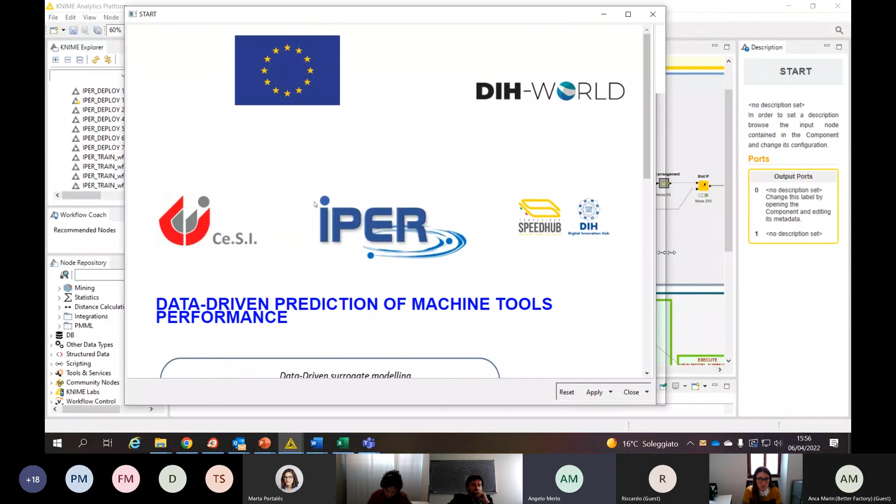This is the tool where the engineer starts the analysis. I created a web interface that summarizes the characteristics of the tool. You see machine data import—you can select to insert data of the new machine you designed manually, there are interfaces here I will show, or you can import from a file. You prepare a file where you insert the input variables. You also have a short overview of the performance of the trained model, which was trained with the historical data.

So you see that, for example, for class prediction, the best model was random forest with 94% accuracy, so very high. Also for KY, for frequency. For the point prediction, this is for class. For the point, you see the R square related to KX.

So if you don't retain acceptable, you can retrain the model. But to retrain the model, you should be sure that you have included other past historical data for training. Otherwise, if you have nothing new, you should rely on this trained model.

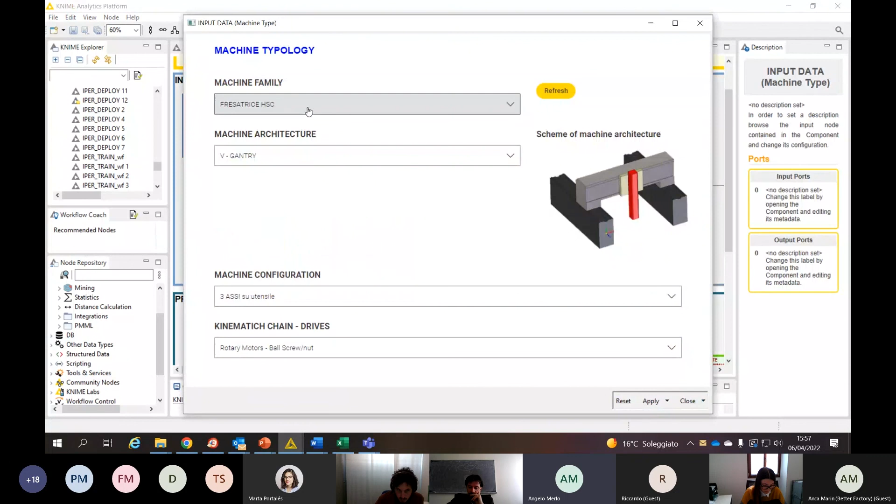Okay, so after that, the engineer can start to select, insert the feature, the machine family. You see if a boring machine, milling machine. Okay, if the architecture, as I said, a categorical value. So it's important that the algorithm is not only for numerical ones, but works also for categorical input.

So here, for example, gantry machine is what you see. If we change, you can refresh and see the different architecture of the machine. So, and you can proceed. The engineer can insert what new machine he is designing at this moment.

Machine configuration, 3 axes on the tool or 2 axes. This is specific for the designer. I don't expect that everybody can understand here, but kinematic chain, you have rotary motors, ball screw, rack pinion, linear motor, and so on. And you can insert, you can go on and insert all data.

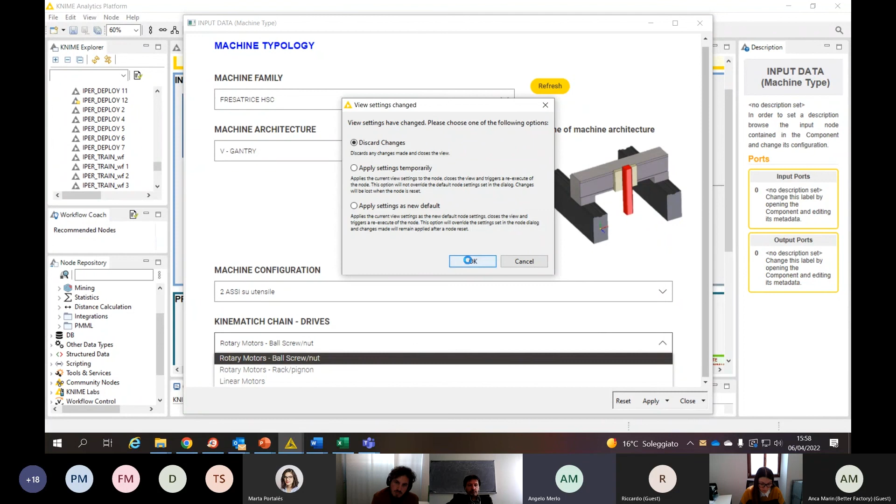Also here, for example, the type of guide: roller, sphere, hydrostatic, and so on. And you can go on. I don't want to bore you too much.

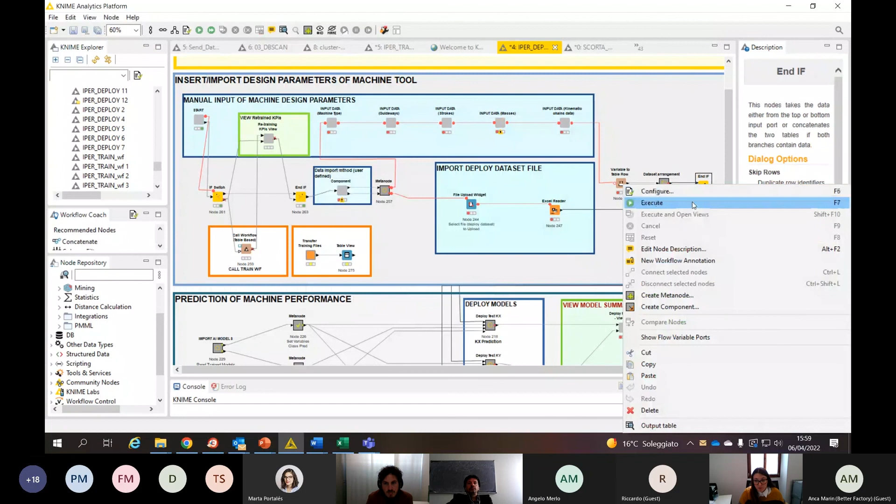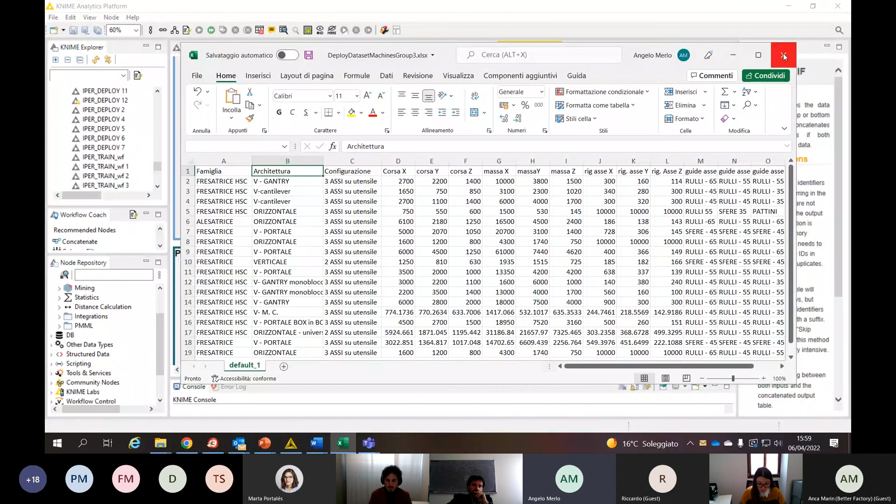The other thing you can do is import by file. So if you import everything by file, you should prepare a file like this one, where you include your data. Maybe you have designed several machines, so you can put data for not just one but different machines you are designing. And at the end, what happens is that the tool...

I'll show you some testing that we have done. And here are the results. You see, for example, here the actual value, what is calculated by simulations and practical tests, and the prediction. This is the class actual and the prediction of class.

Let's have a look at the point. So you see that it's very close. The error is very, very small.

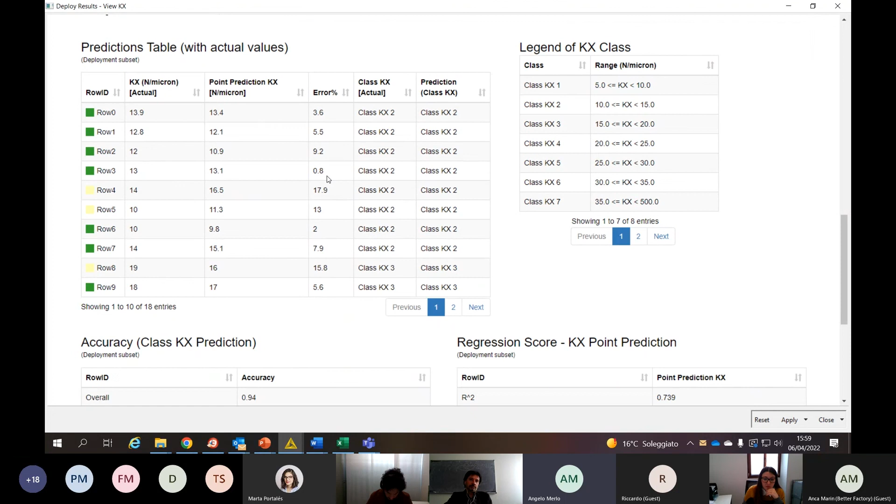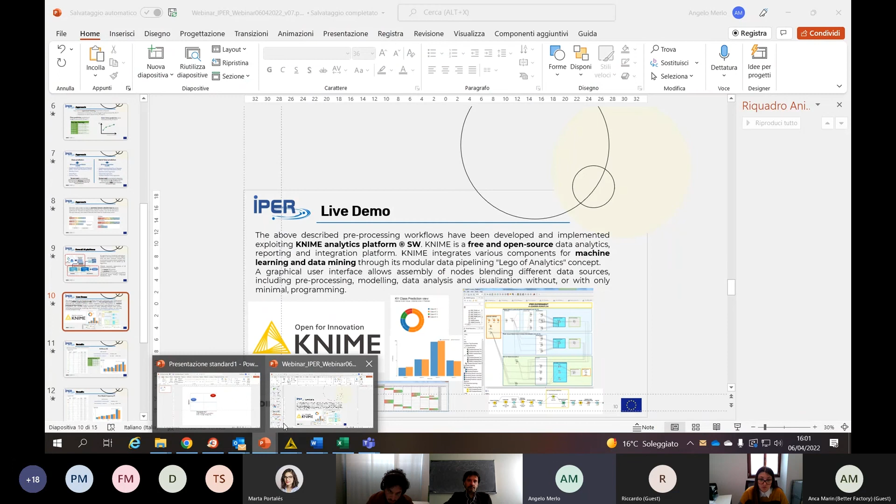This is an example for KX, and we obtained the same result for all the others. So this is just to show the applications. I'll go back to my presentation.

So in synthesis, you can see here what we have seen. The results are very, very, very good, both for example for KX, and also the modal frequency.

As I said, there is some machines where the actual value, what has been measured or simulated by finite element, is not so close to the prediction, but this could happen because there is some new machine that has some characteristic that has not been considered in the training of the algorithm. But most of them are very, very close.

So, for example, in the early stage of machine design, you can use this when you have just a rough design, not the final one. So as I said, in conclusion, the data-driven approach enables a quick analysis to predict the performance of the machine tool, especially in the early stage. It takes around 10, 15 minutes to train, generate the algorithm, and apply it, as you have seen.